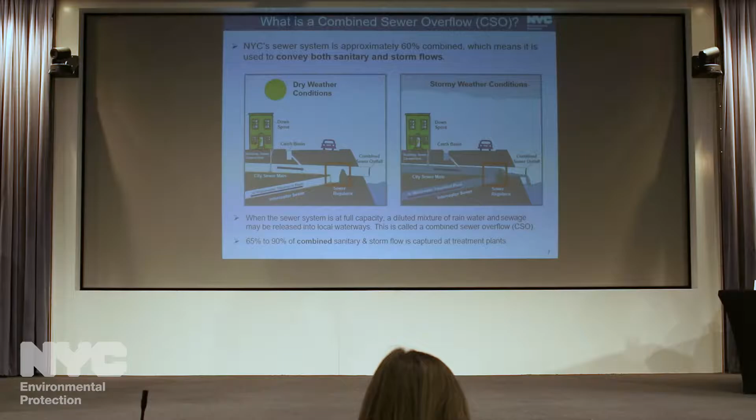So what is a CSO? That's why we're here today. I think it's pretty simple, and the first thing I want to say is we all think CSOs are bad—it's a release of raw wastewater into local receiving waters, and our goal is to ultimately reduce them to the maximum extent we can. So I'll talk about what it is.

Like most older municipalities around the country, there's one sewer pipe beneath each street, and that pipe accepts wastewater—sanitary sewage from houses and commercial facilities—and stormwater runoff that hits the street and goes into a catch basin. It all goes into one pipe. On a dry weather day, when there's no rain, only sewage from buildings goes into this pipe, runs down, and goes to a wastewater treatment plant where it's completely treated. Today it didn't rain, so every drop of sewage in the city went to a wastewater treatment plant and got treated.

On a wet weather day, however, about 10 times the amount of water can get into the sewer system compared to a dry weather day. The way the sewer system was built, most of that water still makes its way to a wastewater treatment plant—we treat about 470 billion gallons of water per year. But on wet weather days, there can be some releases, and per year we release about 20 billion gallons of that water. So we treat 470 billion, release about 20, and the long-term programs we're here to talk about today address those overflows.

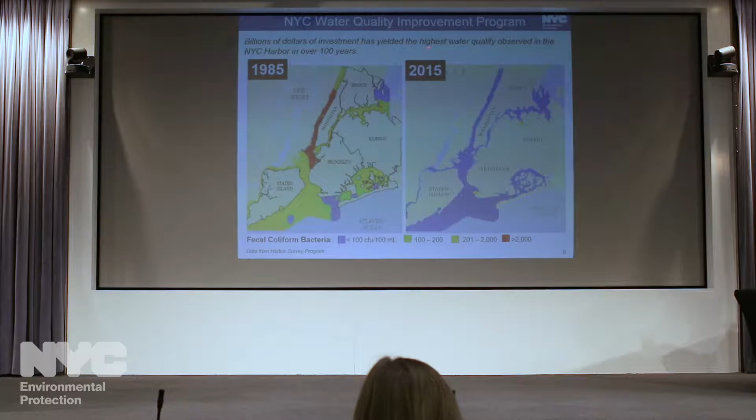Because of those investments, I want to point out these two graphics we put in our annual harbor water quality report. In 1985, many of the waterways in New York City had very high fecal coliform bacteria counts. Some people called the Hudson River an open sewer back then. But because of all the investments made over time, we've done a lot better, and most of the harbor now has less than 100 fecal counts.

It's swimmable water now. But it's tough to see in the graphic, there are places like Flushing Bay, Flushing Creek, Coney Island Creek, and some of the tributaries in the Bronx that still do not meet those standards - you can see little bits of green and yellow in there. So the focus of our long-term control plans is to address those tributary water bodies and try to improve them.

So I am done, and I'm going to turn it over to our Deputy Commissioner for Sustainability, Angela Licata, who's going to talk about our Green Infrastructure Program, which is a key component of our long-term control plans.

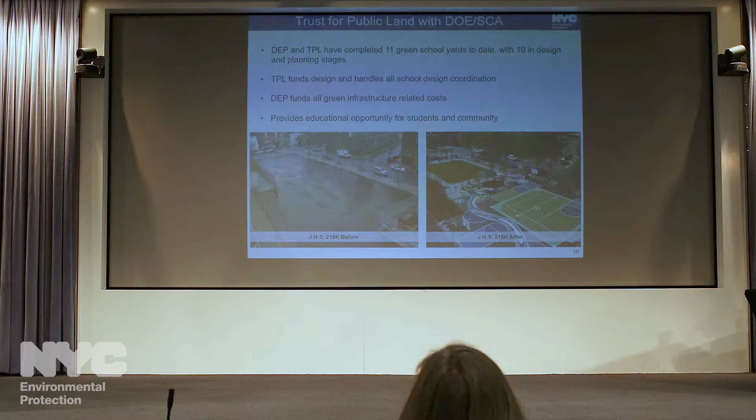Okay, we'll start with this one. This is a Trust for Public Land partnership that we have. On these school playgrounds, everybody's very familiar with that asphalt lot-line-to-lot-line playground. What we were trying to do is work with the Trust for Public Land to really transform those sites into more active recreational opportunities, not just for students but also for surrounding neighborhoods. As part of this program, they're required to keep these sites open longer to encourage more active recreation by the larger community.

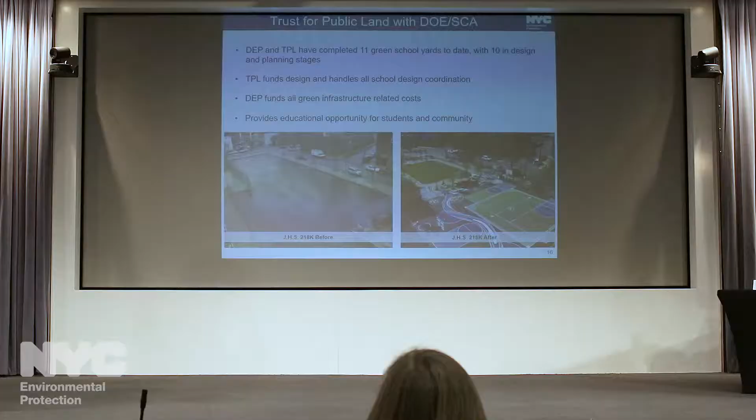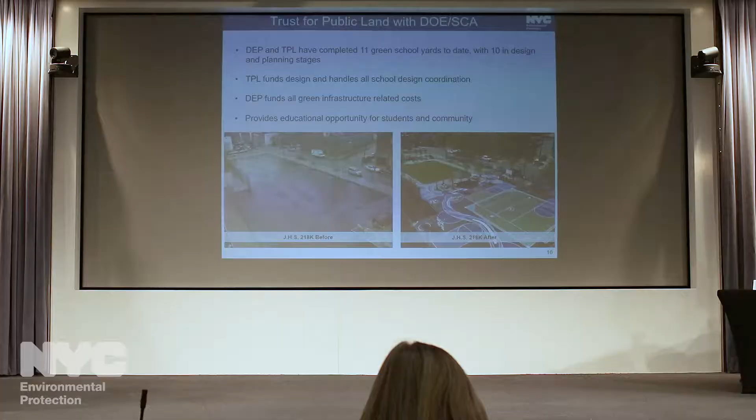What you don't really see in the picture on the right is what's under that turf field. Under here is where we would dig out and do stormwater detention - a large volume that we can capture on that site, preventing stormwater from going into the sewer system, thereby preserving the sewer system's capacity and reducing the propensity for combined sewer overflows.

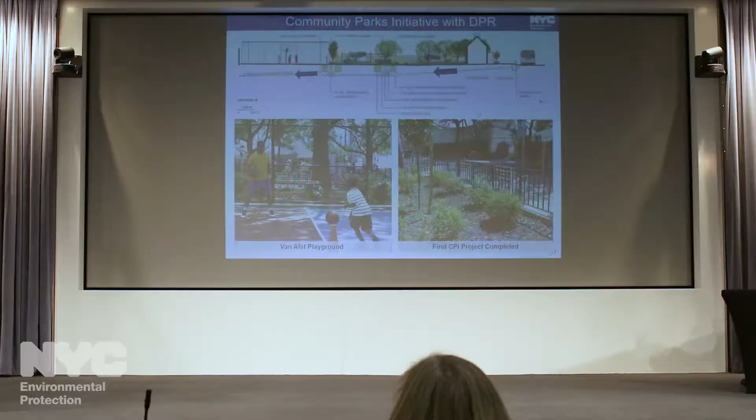This is the best opportunity when we're going to be retrofitting these properties anyway and, in many cases, excavating soils, to get in there and look for opportunities to do stormwater management on those sites. These projects are really great - this is Van Alst Playground, the first one that was done, but they're really beautiful. Not only are they providing stormwater benefits, they're providing other community co-benefits, as we call them, because they're improving air quality, cooling the city, and providing recreational opportunity.

So private property, this is our last initiative with respect to our Green Infrastructure Program, and this is proving to be one of the toughest. I'll be honest with you. It is a difficult venture to incentivize the private sector to install green infrastructure on their property.

New construction is really not a problem. We have detention rules that require new property owners to manage stormwater on site, almost 90% of it must be detained on site. But how do you get people that aren't necessarily investing in their properties to potentially dig up some area or make those investments that would allow for stormwater management to happen?

So what we're doing is we have a grant where we're doing 100% reimbursement. If you're a private property owner and want to join our grant program, we will reimburse you 100% of the costs. So do encourage people, if you hear of anybody who might be interested, to come see us about this grant program. We have rolling admission, and we have invested more than $15 million to convert 34 properties at this point in time.

Some of them are really, really nice. And we are now looking at how do we do some longer range thinking on this. We would really like to put together an RFP and have an administrator who could potentially reduce the transactional costs of each person that would have to do business with the city or sign a grant application with the city.

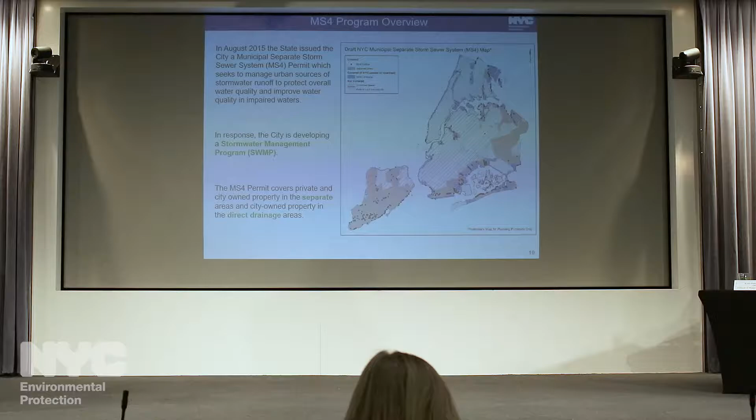Now I'll talk a little bit just about the MS4 program, only because what an MS4 is, it's sort of a sister to the CSO concerns, right? CSOs mean the stormwater and the sanitary flow are in one pipe headed to the treatment plant. The area of the city, about 40%, that is separately sewered, means that you have one pipe for sanitary flow and one pipe for stormwater.

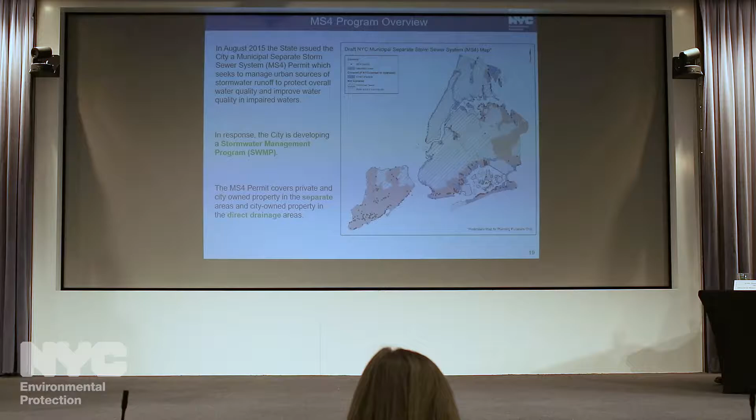And what we have is another regulatory obligation to take a look at those stormwater sources and think about what we can do to treat that stormwater before it's directly discharged. So it doesn't have any sanitary sewage, that's not our concern, but there are other pollutants that it picks up over the urban environment that then get delivered to these water bodies.

So we are embarking on a new initiative with an MS4 permit. We will have a stormwater management program for the entire city of New York that will be publicly available - August, it'll be August of '18. So that's coming very soon.

And I thought it would be worthwhile just taking one moment to explain what's integrated watershed management. Because we don't want to be looking at the city as a CSO area or an MS4 area. We really want to be thinking about how to integrate the concerns we have about these pollution problems, and how we can look at the land uses and behaviors for the areas draining to our water bodies. And how do we seize upon the opportunities where we have some integration between the combined area and the separately sewered areas? You know, how can we think about this more programmatically?

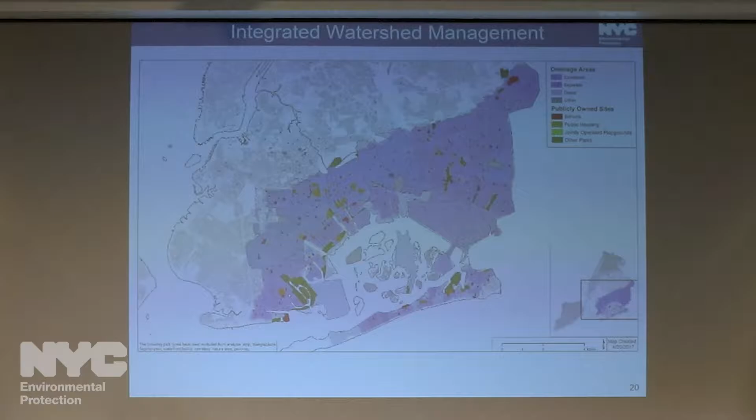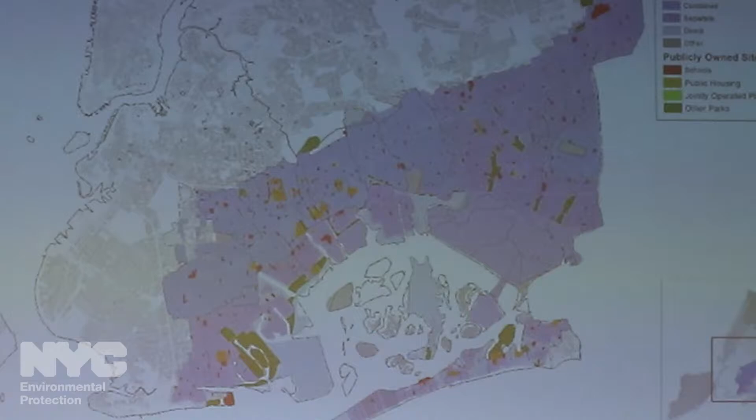So this is a snapshot of Jamaica Bay, which we think is a really good case study in how to do this. And what the map shows you is that we have highlighted all of the opportunity for schools, public property, parklands, and also taking a look at what is in private ownership, how large are those lots in private ownership, and what would happen if we could accomplish a 10% turnover or retrofit on those private lots.

And we're starting to try to model what those investments would look like in terms of the budget that it would require, but also what would be the outcome, right? Because we're very outcome driven. We really want to see a water quality benefit for all the money that we invest.

Another initiative happening within the department is something we're calling Cloudburst Planning. Cloudburst is a term we actually borrowed from the Europeans - I think the Danish were potentially the first to coin that phrase. This is when you get so much water that it really overwhelms the design of the sewer system. This seems to be happening more and more as we start to experience some of the predictions of climate change.

We do seem to be having more and more of these intense storms, and so we're trying to study what would happen here in New York City if we took an approach that looked at how you can handle some of this water on the topography, on the land, because you're not going to be able to drain it all through your sewer system.

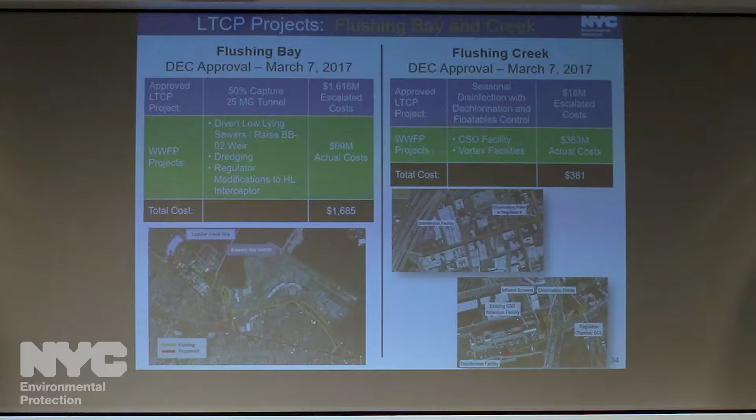Prior investments under the water body watershed facility plans included much lower cost investments, about $70 million, looking at taking flow out of the Flushing Bay area, moving it over to the low-level side of the Bowery Bay drainage area, doing dredging, and modifying some of the regulators to try to capture more storms. So the shorter-term investment was $70 million to try to get CSO reduction out of Flushing Bay. The longer-term investment is the CSO storage tunnel, a 15-year time frame approved by DEC.

Flushing Creek, going forward, we're looking at seasonal disinfection - during that recreational period, that 6-month period I explained, about $18 million for disinfection. The big investment in Flushing already occurred - we built a big storage tank on one of the largest outfalls into Flushing Creek.

That came online in 2006-2007, so it's been operating for the better part of a decade. $363 million was the past investment. We want to add to that and start disinfecting the overflows that bypass that tank, because again, it's not designed to capture every storm. That's our plan there.

All told, just these two projects alone for Flushing Bay and Creek approach $2 billion of capital for this one area. I think this demonstrates we're on the flatter part of the curve in terms of the gains you're going to get. It just becomes tougher and tougher to get.

Newtown Creek, another big water body, a lot of CSO going into it. We've proposed two projects, one shorter term and one longer term. The longer term project is almost a 39 million gallon CSO storage tunnel, with 62.5% CSO capture projected, at $1.4 billion of capital in that location, escalated costs.

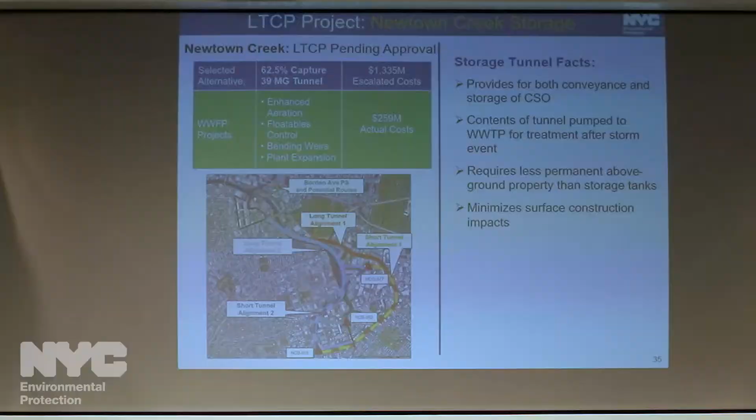Our shorter term project is up in Dutch Kills, right by the community college. We have a small pumping station that exists there, about 3 MGD total flow.

We're recommending upgrading it to about 25 million gallons per day wet weather flow, and running a force main from the pumping station, which is on this side of the creek, over to the treatment plant, pumping it right out there. That's about a $90 million project for the pumping station.

Shorter term project, we can do that quicker. The tunnel is on the order of $1.4 billion - again I think that number's low. But our total investments there approach $1.7 billion, at least those we've estimated today.

So Newtown, a lot of investment. We've done a lot, particularly around the treatment plant, over the last 20 years. More to come in the drainage area over the next 20.

Bronx River, conveyance improvements. Prior, we invested heavily in the Hunts Point treatment plant, upgrading the headworks in Hunts Point, trying to get more flow to Hunts Point, which Bronx River is in that drainage area. That's the $46 million actual cost in the waterbody watershed facility plan projects.

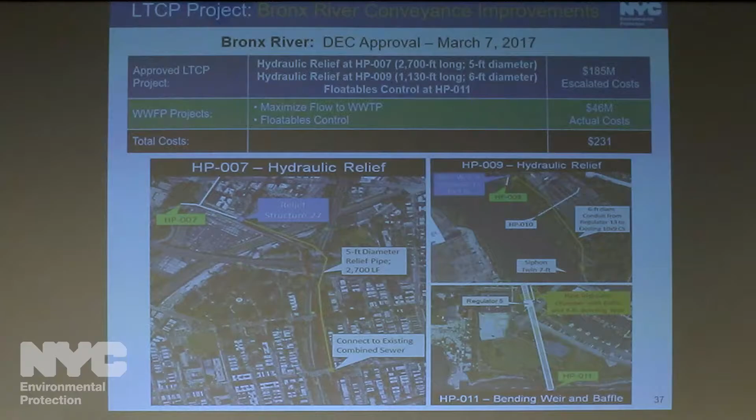Going forward, we're looking at moving flow out of the Bronx River, more downstream toward the treatment plant, trying to treat more of it - almost $200 million of pipe improvements to get that flow out. Relief at HP-007 and 009, two of the largest outfalls right on the Bronx River, and floatables control at HP-011. Again, almost $200 million on the Bronx River for a total cost of $231 million for that area.

Alley Creek, we had invested prior a lot of stormwater investment. For those of you who know that area of Queens, you'll remember in the 90s it was a very flood-prone area. We invested $151 million or $139 million there. A lot of that investment was in storm sewers, trying to improve the drainage in the area and improve the quality of life.

And we also invested in the CSO storage tank as part of it. A really nice synergy kind of project where you're building these storm sewers, and we also found an opportunity to build the CSO storage tank. Now we're going to add to that CSO storage tank with add-on disinfection. So most of the investment was made prior, and now this is just disinfecting what overflows through the tank. $151 million total investment, most of that sunk costs, past costs.

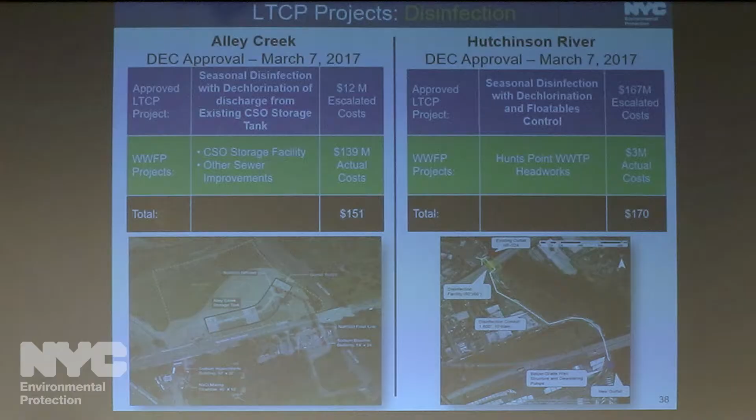Hutchinson River - we had invested, again, in the Hunts Point headworks improvements that I talked about earlier. Most of that really improved Bronx River and somewhat Westchester Creek. A little bit for Hutch River, so we've got a little allocation there for that. But most of the project is ahead of us in terms of CSO control, about $170 million that we proposed, a plan for Hutch River that's approved by DEC and we're moving forward on, which is basically one of the largest outfalls in Hutch River. Build a conduit, 10-foot diameter tunnel, quarter-mile tunnel, and disinfect the overflows from that with floatables control. There's some scalability to that over time that we might add down the line, but there's other inputs to the Hutch River as well that complicate the issues. This made the most sense as a first step. $170 million total cost for the Hutch River, most of that in front of us.

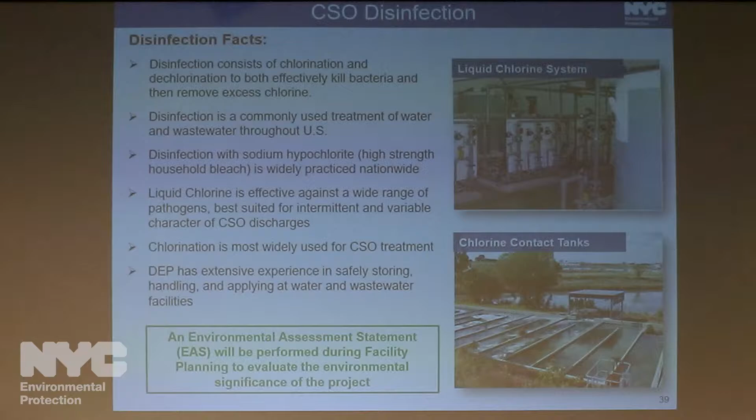CSO disinfection - so I've talked a little bit about CSO disinfection. I know it's a little bit of a controversial topic. When we say disinfection, what we mean is we're going to chlorinate and we're also going to dechlorinate. So we're going to hit it with chlorine, kill the pathogens, and before it's released to the water body, we're going to hit it with sodium bisulfite and knock down the chlorine, so that when we discharge, that discharge is not heavily chlorine laden, which might kill critters in the water body, which is not our goal. So it's a chlor-dechlor alternative - anywhere I'm saying disinfection, I'm talking about chlorination, dechlorination. It's something that's used pretty commonly. We've been chlorinating at the treatment plants for decades, and now we're starting to dechlorinate at the treatment plants just because of concerns with chlorine toxicity. So we're going to take the same approach with the CSOs.

Liquid chlorine has proven to be an incredible disinfectant over time. If you look nationally, a lot of places use it as their disinfection technology of choice. We're always looking at new technologies, always open to that, but it seems like the most tried and true for the application that we're looking at for the CSOs. And it's in 3 places that we're looking at that disinfection, so we're not taking that approach everywhere. It is a combined approach - we continue to have a diverse program.

Additional investments - Coney Island Creek, as mentioned, the Avenue V pumping station, almost $200 million we put into upgrading that pumping station, building an enormous force main to get a lot of the wet weather flow out of Coney Island Creek, up to 3/4 of it, toward the Owl's Head treatment plant. We do a lot of flow monitoring. Illicit connections is always an issue that we face in all of our drainage areas, which causes dry weather overflows. People can connect improperly to storm sewers. There are a lot of reasons those things happen, so in places like Coney Island Creek, we continue to identify those issues and work with the local community and elected officials to try to address it, and work with DEC as well. And as Pinar Balci, who's on the panel, mentioned before, it's also an MS4 priority water body for stormwater. So there's a large stormwater load to that water body, so that's on Pinar's list in terms of the stormwater focus.

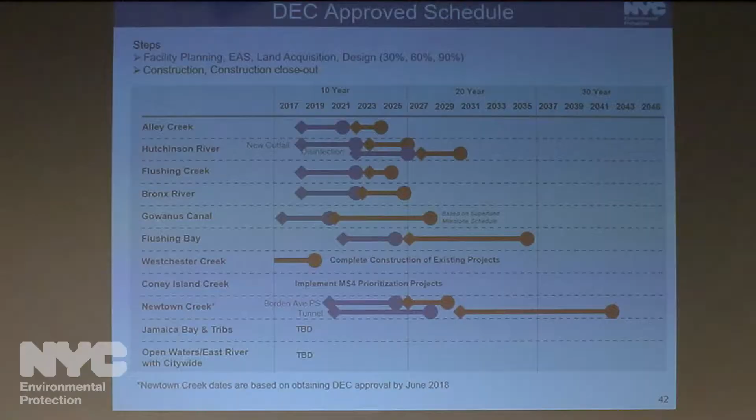So what does all that mean? We've got schedules that are approved now by DEC that we're now beholden to and we're moving forward with. So Alley Creek, you see the facility planning, land acquisition—the blue lines on here are all the lead effort, and all the construction is highlighted in the orange. A lot of these projects, like I said, we've sunk a lot. There's a lot of infrastructure working. But the next phase of projects, the add-on disinfection, more CSO storage, they're coming.

So Alley Creek, 2025; Hutchinson River, 2026, 2027—you can see this on the plot. Flushing Bay, Newtown Creek, two of the longer timelines on here. This is billions of dollars of investment. That's just how long it takes those investments to percolate, to get in order, to get the siting, to get that project built.

The nice story on Newtown—well, first of all, Flushing Creek, we've invested in storage already, so we've started storing. We've invested interim in Flushing Bay in terms of modifying the system and trying to get more to the plant. Newtown Creek, that's the Borden Avenue pumping station. We think we can finish that in 10 to 12 years. $90 million investment, start getting Dutch Kills 75% capture, pumping it over to the treatment plant. The tunnel's going to take a lot longer for those three back-ended outfalls—much more aggressive project.

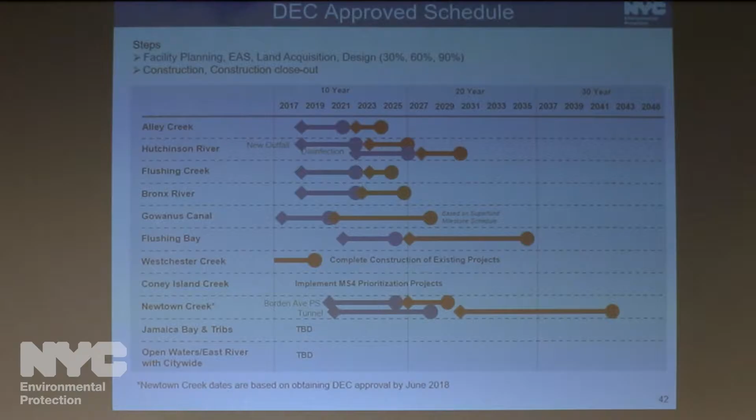And then Jamaica Bay and Tribs and the open waters, they're in front of us. We haven't finalized those plans. We'll be doing a lot of public meetings citywide. You should be on those invite lists. We've seen a lot of you at the public meetings. Really appreciate your input and your participation and your passion about it, and we'll continue to do that.

So one barometer, and Commissioner Sapienza has really pushed us on this: what's the best we could do? If we got 100% CSO capture, what would our attainment look like? And 100% CSO capture comes with an estimated price tag of upwards of $30 billion. So it's a massive program, right? But just as a benchmark, what's the best we can do?

We have a pretty wide, diverse program in a lot of areas, as Angela was mentioning, on stormwater control, cloudburst planning, that kind of thing. So this alone doesn't really move that bar. That's something we keep in the back of our heads: if we took out every drop, or for the most part every drop, for a reasonably sized storm, what's the best we could do? Some of these, it's just not a CSO problem. We're kind of on the flatter part of the curve, and that's just the reality we deal with. I know you as our partners, as our stakeholders, have to deal with that too. Like, what does that mean? Where's the smartest place to spend money? This is just a way that we benchmark that against in terms of the best we could do.